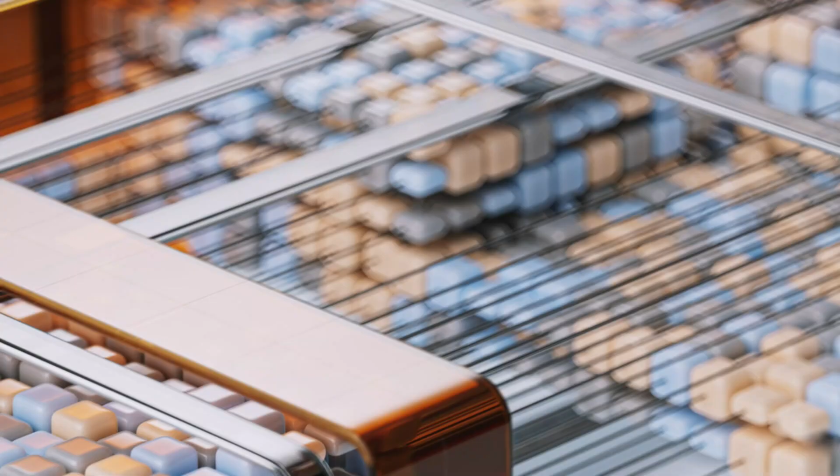Today, detection methods like FTIR and Raman spectroscopy are accurate but slow, expensive, and confined to laboratories. What we need is a low-cost, portable, and real-time solution. Our idea is to build a field-deployable sensor system that can detect and count microplastics in water within minutes.

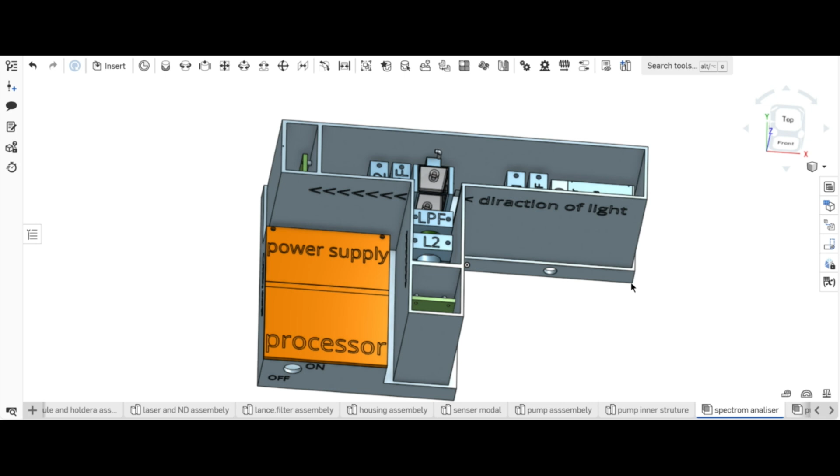Here's how it works. Here we can see a 3D model of the device that will be used for this. On opening the lid, we can see the inner workings of this device. First, the water sample is filtered to remove any large debris. Then, the cleaned sample enters from the top to a flow chamber using a microfluidic pump.

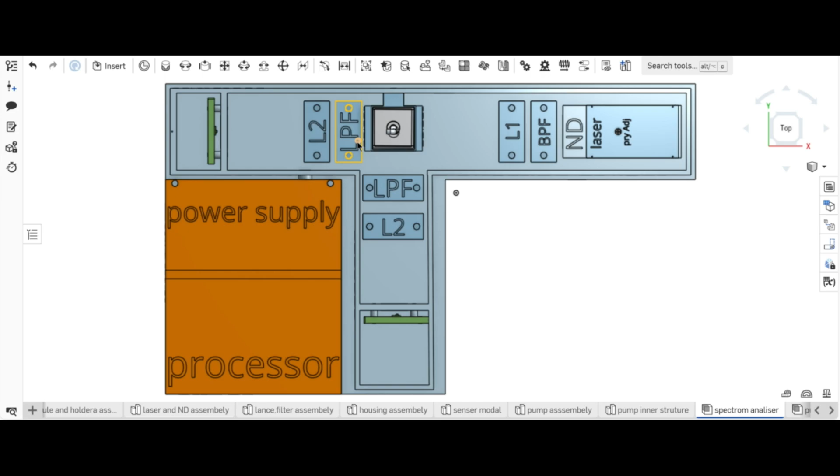The process starts with the UV laser of 405 nanometers. The UV laser is first passed through a neutral density filter to control its power output, then through a bandpass filter to remove any random excitation generated by the laser, after which it gets passed through a 40 mm focal length lens. Inside the cuvette, the water is passing through a very narrow channel to align all the particles in a straight line.

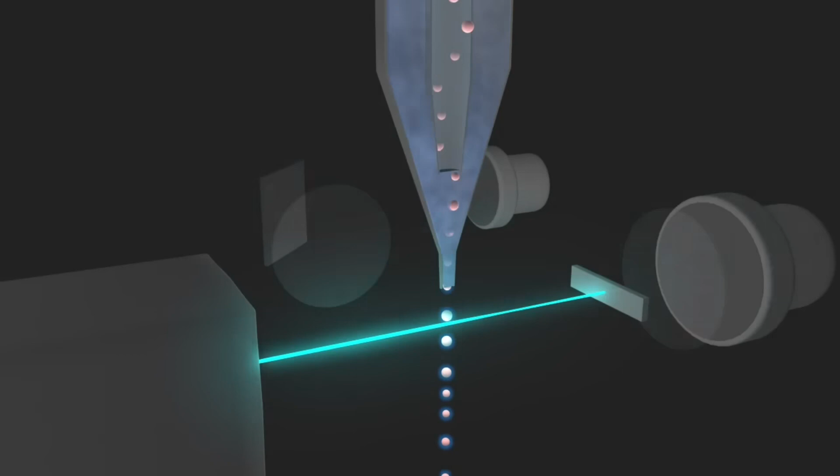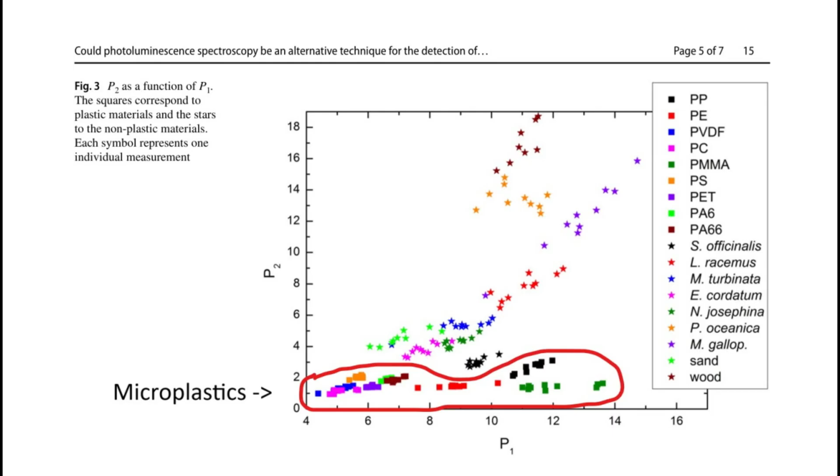Then the UV laser excites the microplastics in water, causing them to fluoresce. A UV spectral sensor, the AS7341 to be more precise, captures this fluorescence signal. Certain calculations are then performed on this data to obtain two scores, P1 and P2, which determine whether the object is a microplastic or not.

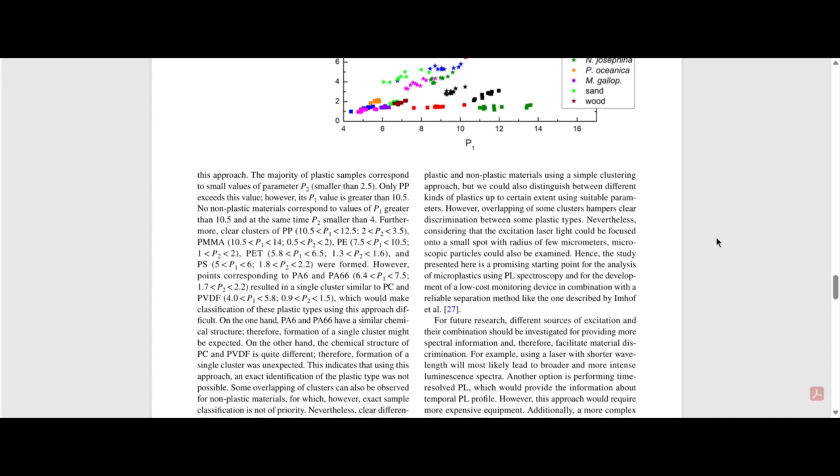According to this 2019 research paper, "Could photoluminescence spectroscopy be an alternative technique for the detection of microplastics? First experiments using a 405 nanometer laser for excitation." Finally, the system outputs the count per unit volume of water.

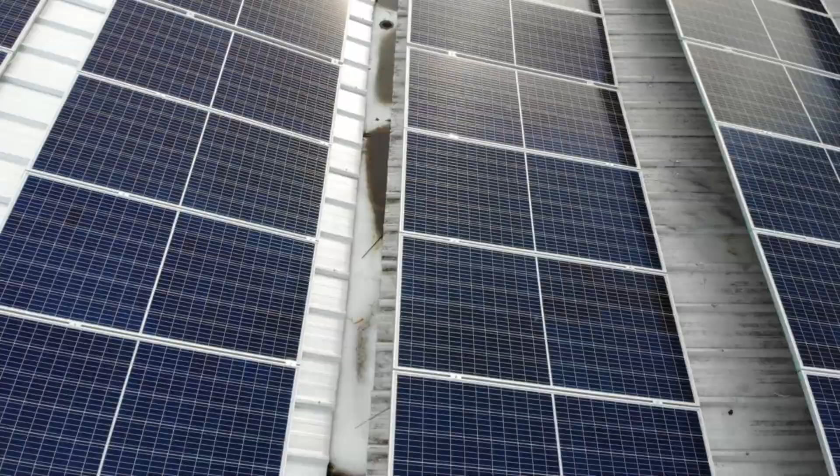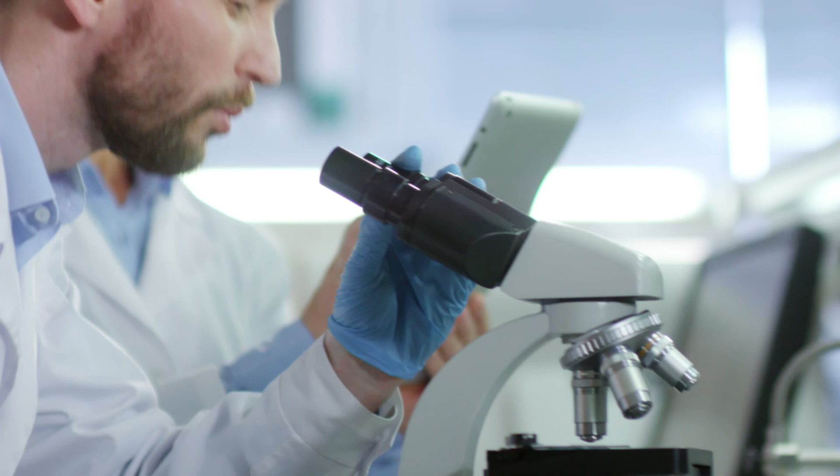This system is low cost and portable, fast, with results in minutes, not in hours. Sensitive enough to detect plastics as small as 10 micrometers, powered by battery or solar, ideal for field deployment. By making microplastic detection accessible and real-time, this innovation can support policymakers, water managers, and communities in fighting plastic pollution.

We are Team Hacksmiths, and this is our solution for the Smart India Hackathon, a step towards a cleaner, safer, and healthier future.